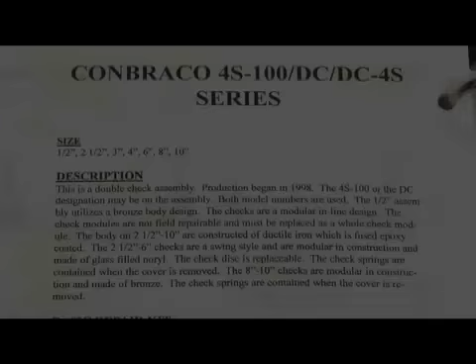The next series we're going to talk about in the Conbraco world is the 4S100 series, also known as the DC or DC4S series, produced in sizes half-inch all the way up through 10-inch. The small half-inch was a standalone size. The 2.5 through 10 were produced in the flange sizes, but we'll talk about that in just a second. Production began around 1998 on this particular 4S design.

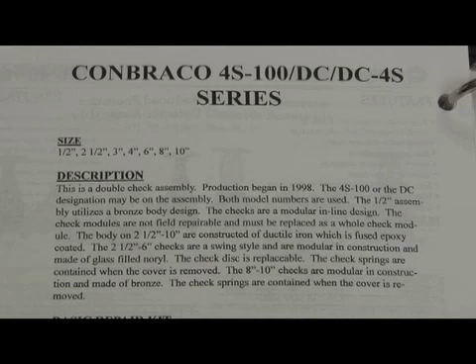I'll talk about this in the different size ranges. The half-inch 4S series looks like this. It was a modular construction, single cover from the top. The cover unscrews from the top, exposes a retainer, and the two check assemblies come out in one piece like that. The check assemblies were not field repairable, and you replace the entire check assembly for the repair. This was only produced in half-inch, and it was used mainly as a bypass valve on their double check detector assemblies, but it was also sold as a plain double check when the need for a half-inch double check arose. Like I say, a lot of them were sold as bypasses for backflow assemblies.

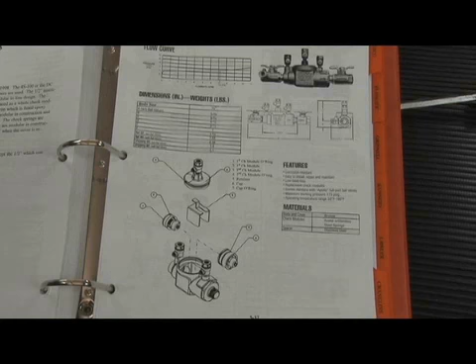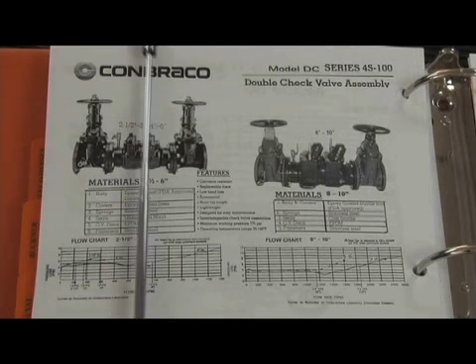In the larger sizes, 2.5 through 10, we had a ductile iron body that was fused epoxy coated. We had two access covers pointing up in the top. Here's the 2.5 through 6, and here's the 8 through 10. The main visual difference on the outside was that the 8 through 10-inch covers on top have a spring under there, and the spring retainer knob was at an angle like this, where the 2.5 through 6 had that retainer pointing straight up, like you see here in this picture.

The 2.5 through 6-inch utilized a glass-filled Noryl plastic check assembly. Here's the body, a ductile iron body that's fused epoxy coated. The check assembly was sealed by an O-ring inside the body, held in with a gasket and a cover on the top. The cover slipped over this piece here, which is a spring retainer knob, and the spring knob was what lined up that cover so it aligned with the bolt holes.

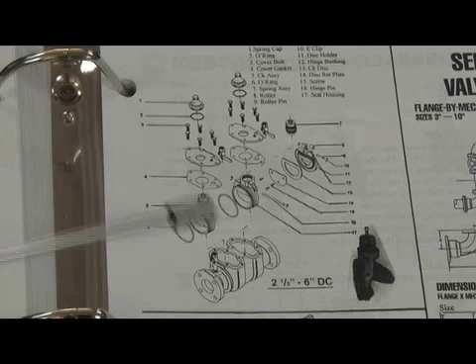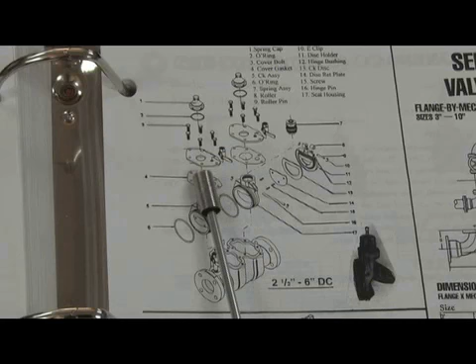When the check assembly was properly inserted into the body and the O-ring was pushed all the way over to this slot here, only then would the cover go on. So the cover kind of acted like a guide for putting in the check assemblies. On the outside of the body there's this piece, this spring cap, which had to be unscrewed for the repair. In other words, you shut the water off, drain the water out of the body. To disassemble, you'd remove this spring cap first, then take your cover bolts off, taking the cover off and the gasket, which would expose the check assembly, which can now be pulled out.

The 8 through 10-inch was a little different in that the disc holders were made of bronze rather than plastic, but the same basic construction where the cover had to come off from the top, which had that spring cap in it, and the spring stayed up into that cover, and the check assembly came out in one piece for repair like this. There was also a double check detector assembly.

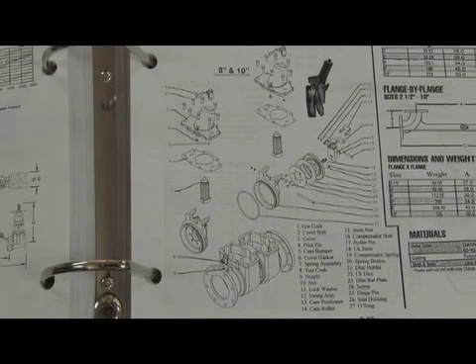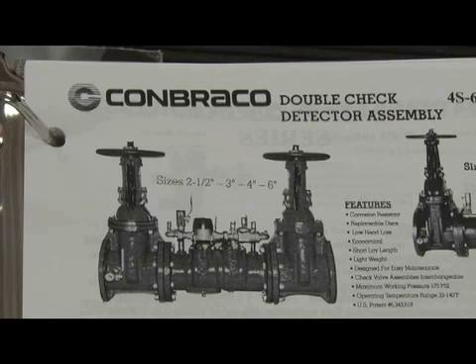Let's go ahead and take it apart and see what it looks like. Let's take the half-inch apart first. The check cover will unscrew from the top, O-ring seal. We see here the O-ring cover. The O-ring comes with the lubricant, so again, you don't have to worry about buying lube - it comes with the particular assembly. Once we see the cover off the top, we'll see that there's a single access to both checks.

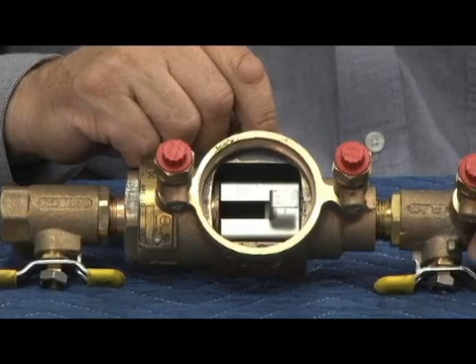If you look closely inside here, you're going to see this piece right here - the retainer is what holds those two checks in the body. It's very important how that retainer holds those checks, because that's what gives that backflow assembly its stability. The retainer pulls straight up like this, and you'll see that it's just a piece of stamped stainless steel. What you're looking at inside that body is this: you're seeing your second check like this, your first check sitting in here just like that. So the function of this retainer is to hold the first check in place like that, and the second check in the body like this. Why is that important?

Well, anytime you have an inline check design, you want as much stability on that check movement as you can get. Remember earlier we talked about that third-of-a relationship between the rise of the check seat and the thickness of the check disc.

It's important to know that causes disc compression, but you can also simulate disc compression by the actual movement of the check assembly. In other words, if this was backed off this far, and as soon as you put back pressure on the second check it moved that far, it's going to cause a tremendous disc compression problem with the assembly. So that retainer is critical, how it sits inside the body, holding the first check and second check in there.

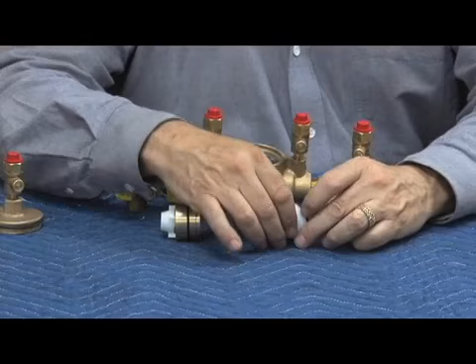Let's go ahead and remove our retainer like this. What that allows is the first check comes out first, second check has to come out second. Now, to remove that first check, we have to unthread it out of the disc holder. What you're going to do is just get in with your fingers and move it. It will come off very easily, turns easily through there, and comes out.

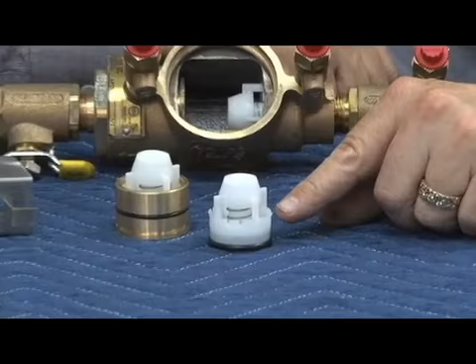There are no threads on the check assembly, but there are these small little ears on the side right there, and these ears are what's holding that check assembly into the body. You can see this ear right there, one here, one on that side, there are 4. Putting it back in the body is why those ears are important to know. We'll talk about that in a second.

Second check, what we're going to do is grab right here and pull out on the second check chassis. Once the piece comes out in one piece, you'll notice the check assembly comes out in one piece like this, sealed by an O-ring, which you see right in there, and the check assembly comes out. The check assemblies are not field repairable, so when you get a repair kit for this, you're going to get a new second check module like this and a new first check module.

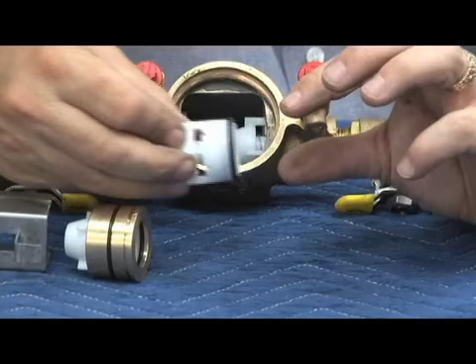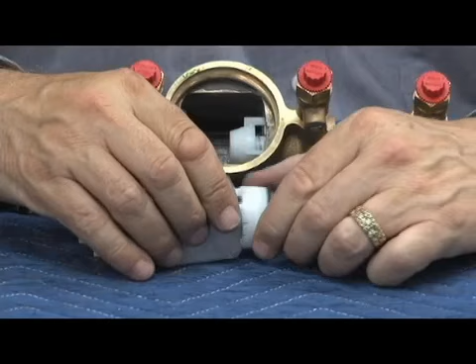Once you've got the check assemblies out and we're ready to put them back in, the first check, which has those little ears we discussed, has to go into the body. As you push it in, you start tightening it, start threading it. That threading, like as if it had a pipe thread, those little ears will suddenly start grabbing the little recesses right here, and that causes that first check to go in place. Once that's in place, it allows you to put the second check in, move it over, and go ahead and put our retainer on, and the check assemblies will look like that inside the body.

So that's our 4S100 series in the 1/2-inch size.

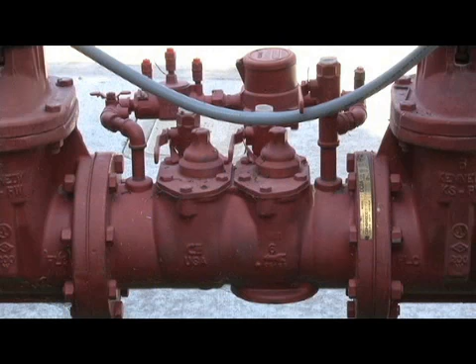We're talking about the Conbraco 4S series, also known as the DC series of backflow assemblies, 4S-600, the DCDA, but I want to talk about that in the 100 series, which is the double check. But I wanted to show you the body because this is what you're going to see.

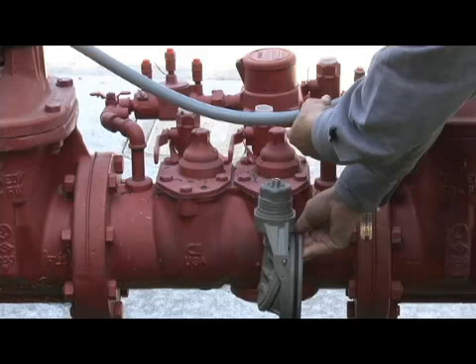Obviously we have our fire alarm hooked up here. The thing I wanted to show you is this piece right here, and this knob literally unscrews off of there. The check assembly sits inside the body just like this, sealed by an O-ring inside, and the knob protrudes to the top of the check cover. That spring knob goes over the top, has a gasket on there, and that's how that check assembly looks like inside the body.

So to disassemble it, we remove the bolts, unscrew this cap, which is a plastic piece, comes off the top, leaves this. Once the cover comes off, now I can work the check assembly out of the body, bring it out in one piece for a proper repair.

So here's what the check assembly looks like outside of the body. Again, we had to remove that black plastic piece, the check cover on top. Check assembly is held in by an O-ring. There's no nuts, bolts, or screws. It's simply held in by friction as that O-ring holds it inside the body.

So at this point, with the cap off the top and that top plastic piece off, we have to get the check assembly out of the body. It's a matter of holding this, which is our spring retainer, and we're just going to wiggle it back and forth gently like this, breaking the bond of the O-ring, moving it gently, and then the check assembly comes out of the body in one piece and looks like this.

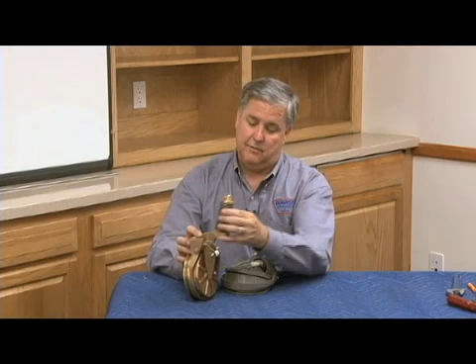So the 2.5 through 6 is a plastic body like this. The 8 through 10 inch utilizes a bronze body, and it looks a little bit like this. This is actually one from the 4S200 series, but you've got the idea of what it looks like, and the check assembly sits like this inside the body. Putting it in the same direction as the other one was, it sits like this. Here's what the 2.5 through 6, 8 through 10 will look like.

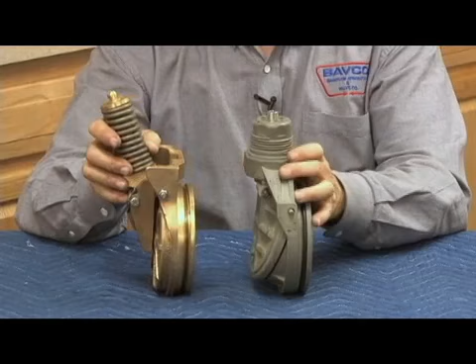Remember I mentioned earlier when we were looking at the pictures of the body that the straight cap on top we saw in 2.5 through 6, and the 8 through 10 had an angled pattern, so you can see what it looks like here. We'll talk more about this when we get to the 4S-200 series. So back to this one.

Now I have the check assembly out of the body. How do I get the disc out of there? Well, again, there's an O-ring seal inside the body, so remove the O-ring, put the new one back in. But to release the spring tension on this unit, all I do is grab the top spring knob, and it unscrews.

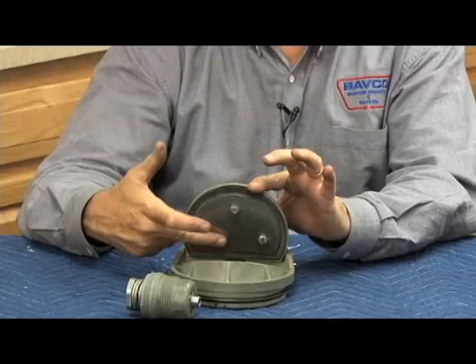The spring is contained and stays within that spring assembly. What that allows me to do now is get into the check assembly. By driving out this pin through here, the check assembly will come out in one piece and I can fix it. Some people like to just take the 3 bolts off like this and change it without driving that pin. You can also do it that way.

Change the disc. You'll notice that the disc is not an O or a round shape, but it's a D-shaped disc. In other words, it's flat right here, and then has that rounded portion there, so it looks kind of like the letter D as in dog.

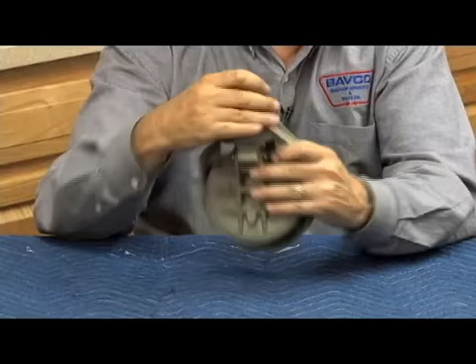Anyway, changing the disc, once you've changed it, putting it back in, the spring knob back in just needs to go in hand tight, back into the body, insert over, cover goes over the top, and then your spring knob goes on top of that check assembly.

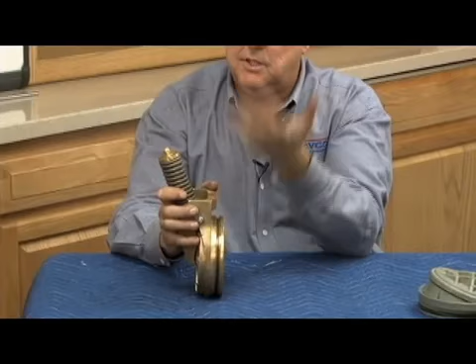As I said, on the larger sizes, 8 through 10, it's going to be a little bit different, and it's going to look like this. So when I take the spring knob off, it'll be at this angle. Knob comes off, the spring will still be exposed. Take my cover off. Spring is not attached this time, it's separate.

Check assembly sealed by an O-ring, same problem. Wiggle back and forth till you get the check out. Once you've got it out, now you can go ahead and change one nut that you see here to go ahead and change the disc.

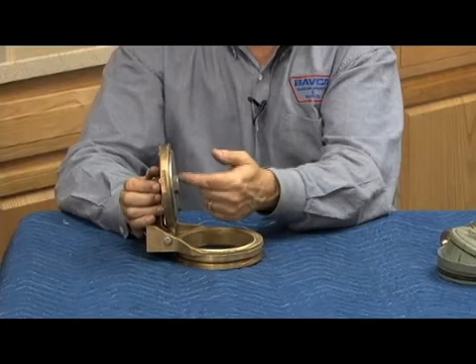Remove my bolt here, replace the rubber disc, back together, back into the body like this, O-ring seal, shove it in. Get my spring back in.

Now, where the spring sits on this one is kind of - you'll see there's a little valley right there where it has to sit, and it sits just like that at that angle. And there's that angle that we see on the cover, just like that, as opposed to the smaller sizes, which is straight up and down. And that's our 4S-100 series of double check assemblies.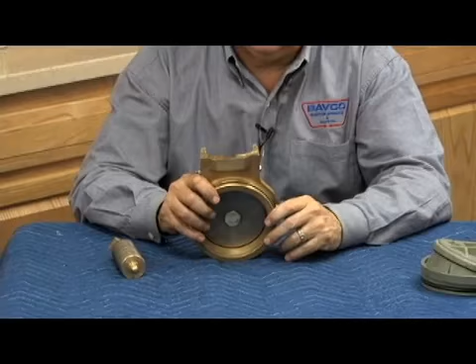Same components we see in the 100, we're going to see in the 200 RP, the 600 DCDA, and the 700 RPDA. The reduced pressure principle assembly is the 4S-200 or RP series, produced in sizes 2.5 through 10 inch. The 4S-200 production began around 2000.

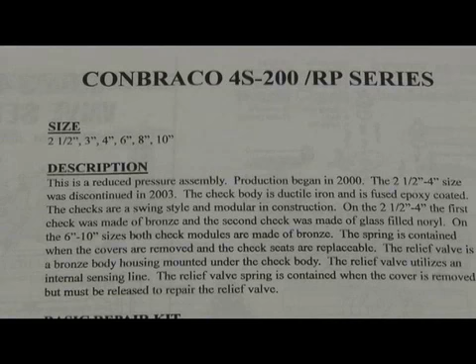The 2.5 through 4 inch were discontinued right around 2003, relatively soon. Other sizes did not receive full approvals and were sold regionally around the country. So if you do have one, make sure it's approved for use in your area. But anyway, the 4S-200 series, let's take a look at that.

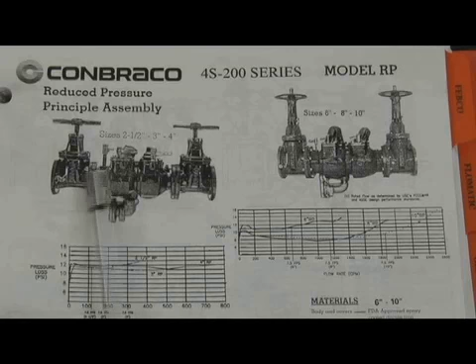Same basic check design as we saw in the 4S-100 series, except the relief valve, which is mounted underneath, similar to what we saw in the 40 series, where the relief valve mounts underneath the check like this, high pressure side on the left, low pressure on the right, and 2.5 through 4 showing this one, and the 6 through 10 inch relief valve body over here.

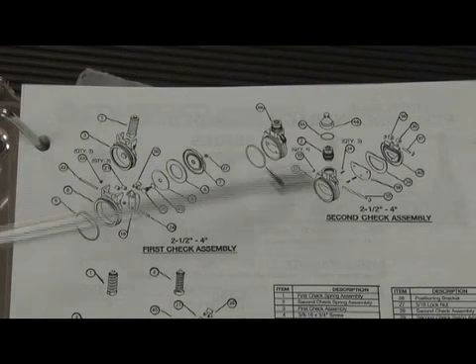The check assemblies, as we saw in the 4S-100 series, very similar. All of the first checks are made of bronze construction, where the second check on the 2.5 through 4 inch is that same plastic as in the 4S-100 series, but the majority of them will be a bronze body construction. With the heavier spring loads, they had to go to the bronze material for a more sturdy check mechanism.

The relief valve, as I said, mounts underneath the check body like this, and they had two different sizes, the 2.5 through 6 inch, and the relief body stayed attached to the body for the average repair. Removing the relief valve cover exposed the relief valve diaphragm, the stem assembly, which came out in one piece, and the seat which screwed into the body did not have to be replaced for the average repair.

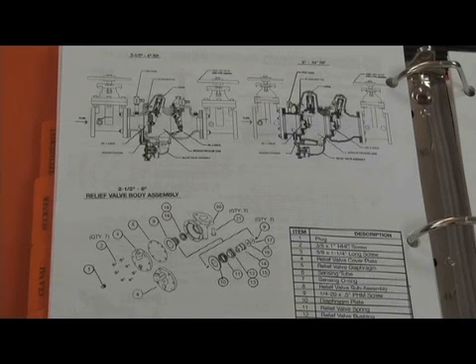This relief valve that was utilized in this is very similar to what was used in the 40-200 series. This is the 2.5 through 6. The 8 through 10 was a little bit different in size and larger, and had a couple little changes, but very similar to the 2.5 through 6 inch. But almost the exact same relief valve that was used in the 40-200 series.

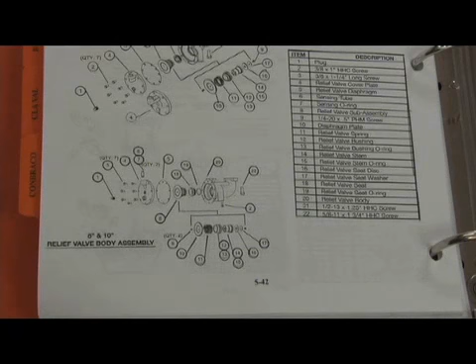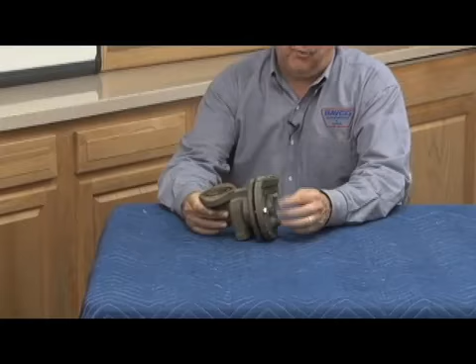So let's go ahead and take the 4S series apart and see what it looks like inside. Checks we're not going to talk about since we just talked about those in the 4S-100 series, but here's the relief valve of the 4S-100 series. Here's the relief valve of the 4S-200 series. So go ahead and remove the body from underneath.

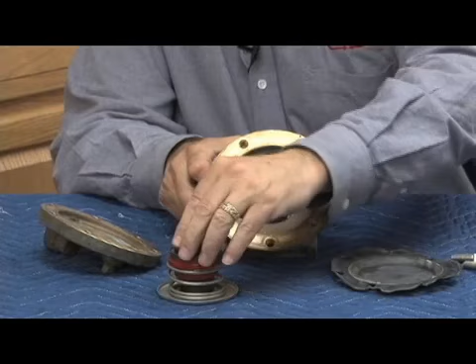Cover comes off. Relief valve diaphragm, relief valve stem. Should look pretty familiar as we've seen before. That same basic relief valve stem assembly that we saw in the 40-200 series is used in the 4S-200 series. Very good and reliable relief valve, been very popular with them, and they've kept it.

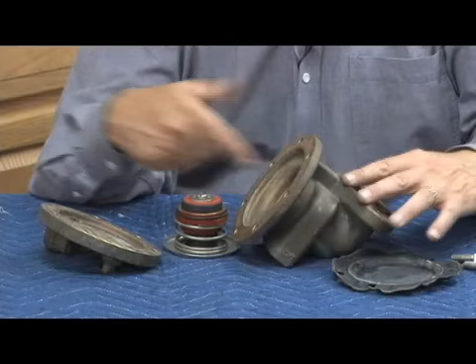Relief valve seat is the glass-filled Noryl instead of brass like we saw in the 40-200 series. Reassembling is going to be just the reverse. We've taken the stem apart, no reason to do it again. And that's our 4S-200 series of RP.

The next Conbraco series we're going to discuss is the 4V, or Victor size series, which is a pressure vacuum breaker, the 4V500. Same thing, different model number for each size. Same suffix numbers on the end denoting shutoff types with their ball valves with unions or regular, that type of thing.

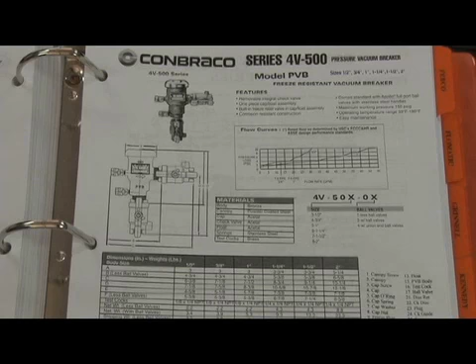But anyway, this is a pressure vacuum breaker. The thing that was unique about it is it had a freeze-resistant feature, meaning it had a relief valve built into the air inlet, so that if the assembly was susceptible to freezing, the relief valve would kick open and release the higher pressures from a freezing condition, hopefully so it didn't damage the assembly.

The 1/2 through 1.5 inch size looked like this. Check assembly was modular, and the check assembly actually threaded into the check body. One piece here. The bonnet assembly was also one piece. The air inlet and the bonnet were attached in one piece, not field repairable. You'd buy the entire bonnet, the entire check assembly, when you rebuilt this unit.

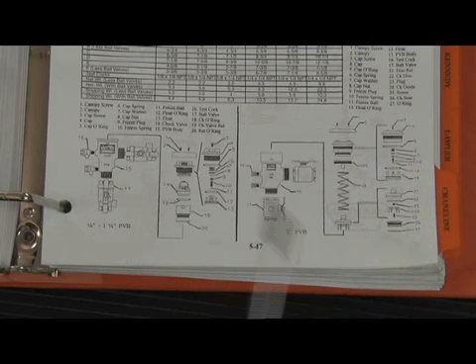The 2 inch was slightly different. It did have a rebuildable check feature where the check assembly would have a disc holder design. But the air inlets on all of them were sealed at the factory and had that relief valve in it for freeze protection. Let's take a look at the 4V series of pressure vacuum breaker.

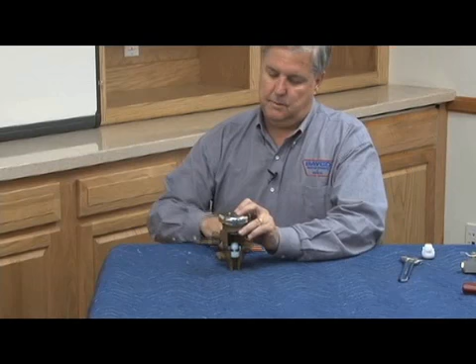So here's our cutaway. Just like with the 40 series PVB, we've got our canopy on the top, which is very important to the working of this valve. Make sure it's there, and just as importantly, put back on when you're done repairing it.

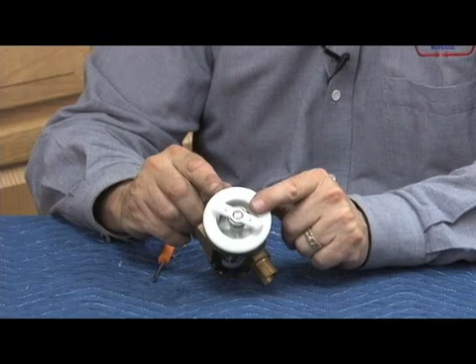Now the bonnet looks a lot different. Remember in the 40-500 series, the bonnet was brass. Well, this is plastic, which of itself is not the main difference to note. But what's different about this one is that at the top of the air inlet spring retainer, there's a small little relief valve, installed to give freeze protection relief on this particular assembly.

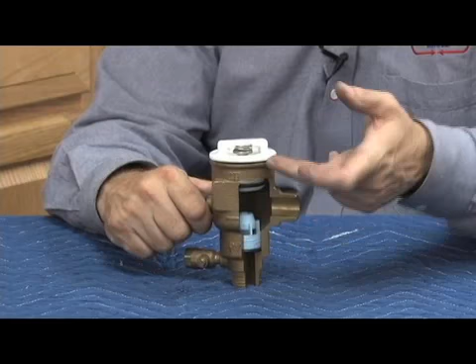When a PVB would freeze, the function of this little relief valve in the top of the poppet, which I'll show you in just a second when I take it apart, made it so that if the body froze, excess pressure would push up on here, generating the little freeze plug to go on the top here where it would relieve pressure so that it wouldn't freeze, rupturing the body. Rupturing something like plastic would be better off than the body itself. Anyway, so there is a freeze protection.

Bonnet assembly would unscrew from the top. When the bonnet came off, O-ring sealed, the bonnet came off in one piece. So the repair of this air inlet assembly was to replace the entire air inlet like this.

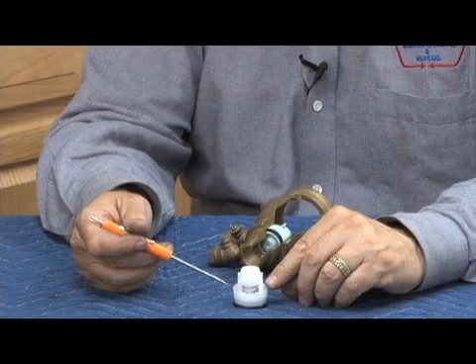Check assembly was a little different. We don't have that little retainer like we saw in the 40-500 series. What we've got is a small check assembly that comes out in one cartridge like this. And just like with the 4S100 series, we have these small little ears on the edge of that disc holder, which are very important to how this works.

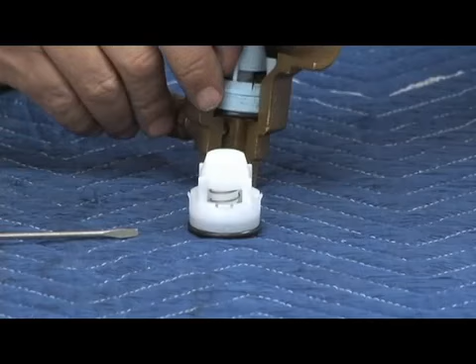The check assembly has to be put down into place, pressed in, and twisted to make sure that it's in place. But just as importantly, when you go to unscrew it out of the body, as you'll notice on the blue one here, I can't pull it up. That's because those little ears right here are holding it in place. So to remove it from the body, you have to unscrew it, and what happens is those ears unscrew out, allowing you to bring the check assembly out in one piece.

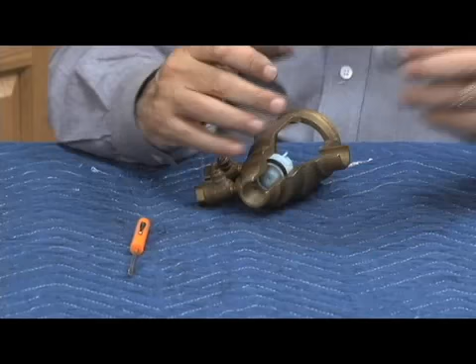Again, replacing the entire check module. On the 2-inch size, the check module is repairable. On the 1/2 through 1.5 inches, it is not. New check assembly in place, new bonnet assembly here, canopy back on top. That's our Conbraco 4V500 series pressure vacuum breaker with freeze protection.